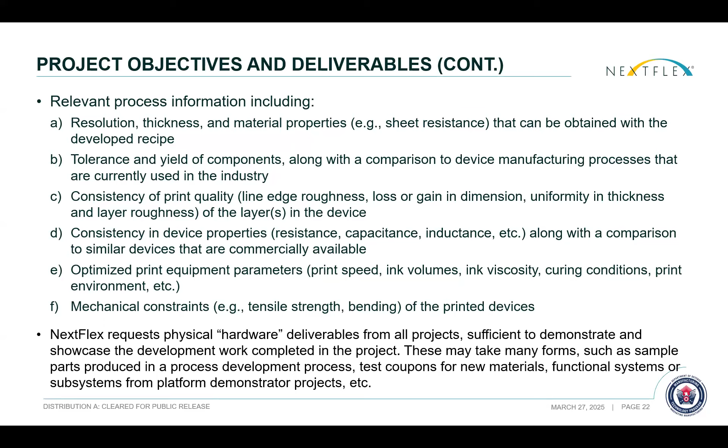We bring that up now because if we don't, it gets pushed out to the contracting stage or the pre-submission consultation. But if it still survives as an outstanding question for you, we'll end up negotiating that as part of the statement of work, and that just slows things down.

Finally, a note on platform demonstrator deliverables. The platform demonstrator topics really are seeking to demonstrate product-like capabilities. We're not funding product development. So let's talk about the difference between a platform demonstrator and a product. A product is a competitive offering you're going to put on the market that needs to address every need in a way that competes against every other product serving the same needs.

A platform demonstrator doesn't have to have all of those things that make your product competitive relative to other products, but it should still demonstrate the product-like functionality addressing the important characteristics of the system, including things like the packaging, the software and firmware support that make it look, at least at some level, like a functional end-use device.

Initially, a very simple concept: oppositely charged black and white particles, bistable—so you take the battery out and 10 years later you still have the same image. And if you want color, you could put a color filter array on top. But what if you wanted a whole wall or big areas to get color? You'd have to have large transistor arrays, which is not practical.

So you see here what's been developed in the meantime. We have full color—this whole room could be changing colors, full color, only using particles: reflective white and yellow, magenta, cyan, etc. But other aspects that can be relevant to a lot of the proposals: it is Lambertian, viewable from broad angles. I said it was bistable, directly viewable without power in full sunlight. Simple segmented printed backplanes, printed by many different methods.

Flexible, absolutely flexible, both the TFTs as well. You could cut them out to any shape, doesn't have to be rectangular.

There's near IR reflectivity. So if you had night vision goggles on in the black and white, you're in a dark room, you could read a Kindle just like it was daylight.

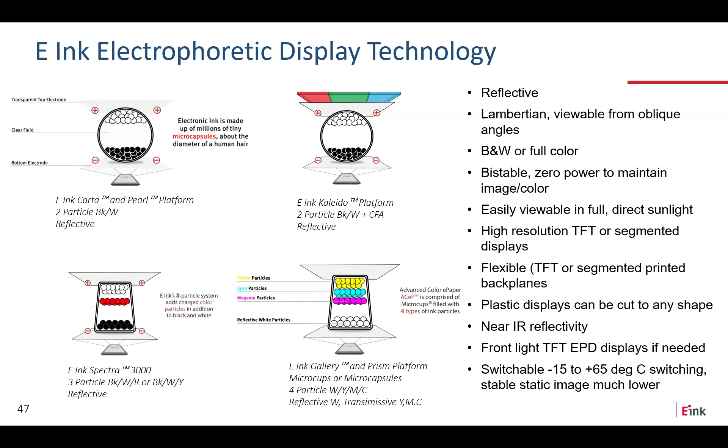And switchable, minus 15 to plus 65. But you could throw these in dry ice and you couldn't switch them, but when you warm them up, you'd still have the image throughout that temperature cycle.

So they're in lots of different products. I won't go through all these, but license plates - you pay your money and change your license plate. California, Arizona, a number of other states.

Manufacturing, Kanban, smart logistics, being able to track information on the line. You could imagine sensors, all kinds of sensors. Vision is our most powerful sense. We're talking about moving everything into a cell phone or whatever for information, but you could have things that turn colors or do things integrated with your flexible electronics as part of those proposals.

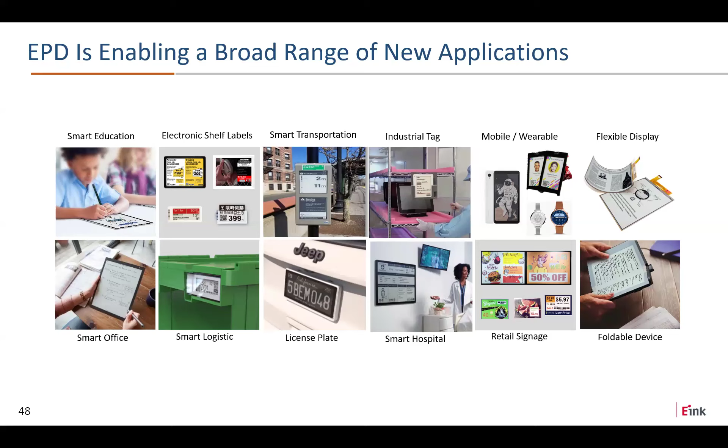These were some demonstrators over the last 15 years, all of which use discrete components, but the world has changed with FHE.

This one has no battery at all. It's a thumb drive. The power of a computer changes the display and you know how much memory you've used.

This was an early one, made in the millions. This is an early Motofone and a PC board, but the back plane was printed onto the PC board. And so the display just involved laminating electrophoretic display material onto the PC board, and you end up with this nice candy bar phone.

Well, we've moved on to smartphones, but you think about FHE and integrating a backplane with all the other printed electronics, and voila, you've got either color or black and white readout.

Beautiful watch, these were a couple thousand dollar titanium watches. Again, you can think of jewelry or other beautiful things where you have a visual effect resulting from your FHE. And this just shows some of the flexible components that went into that.

These two are interesting. This I showed in the NASA kickoff. It's all discrete components, but the power requirements are so low that there's an antenna, a printed antenna in here for data from your phone, but also power. So there's enough power given off by a smartphone to power the display as well. There's no battery or anything on there.

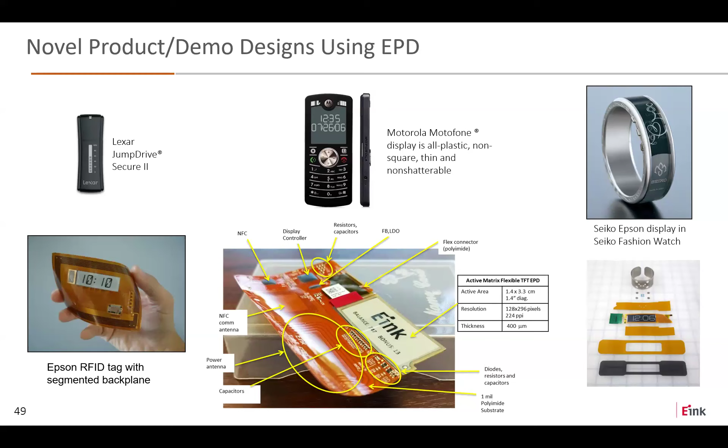So this flexible part is fine, but the rest of it is not. So you could imagine a sticker that's completely flexible because the rest of this now has moved on and it's printed in hybrid electronics now.

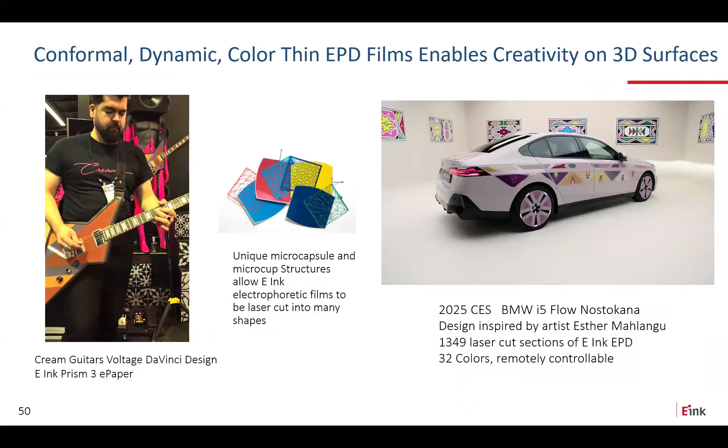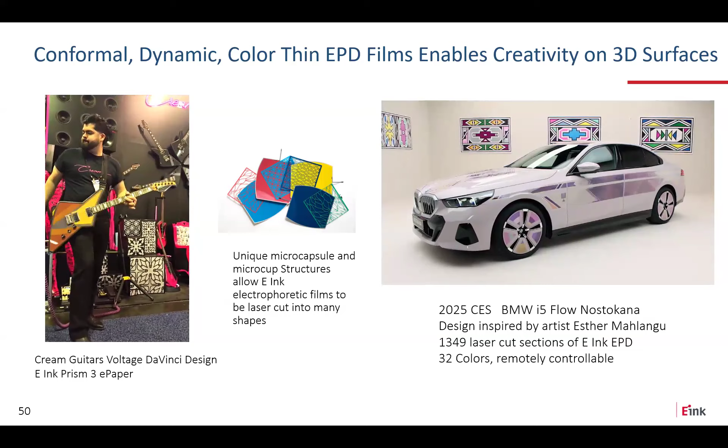Here's some more recent things. This was announced several months ago. This is a cream guitar, color changing car - so any object can be color changing, like guitars. This is work that we've been doing with BMW. It has over 1,000 laser cut electrophoretic modules that are put on there, but this is all the conductors were ribbon cables and everything. There's no reason why it doesn't have to be a car, any object. There's no reason why you couldn't print all the electrodes, all the conductive electrodes onto what you're doing.

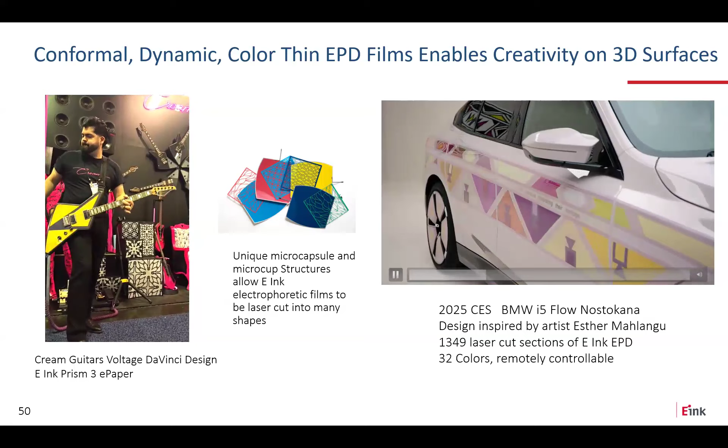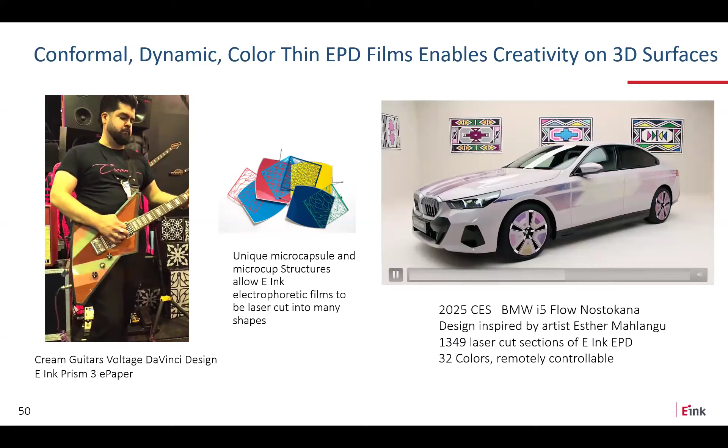And in the lab, we can spray coat. For now, we'd laminate it and then spray coat your conductor on top. So any three-dimensional object with printed electronics now could be color changing.

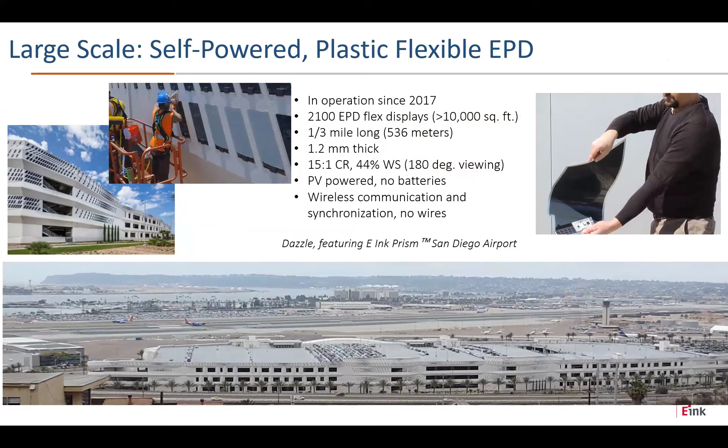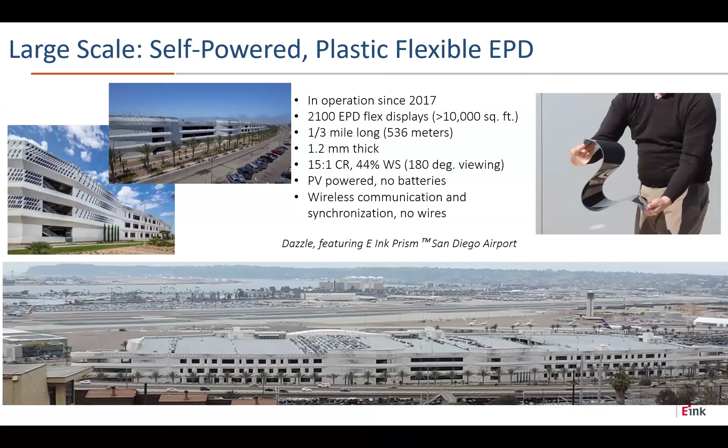This is for those of you familiar with San Diego, driving down Route 5 - this is the San Diego parking garage, and there's over 2,000 modules that you see here that are completely flexible photovoltaic cells that power this. There's no batteries, there's a super cap to store energy, completely solar powered. This has been in operation since 2017. So you drive by, you can still look at it.

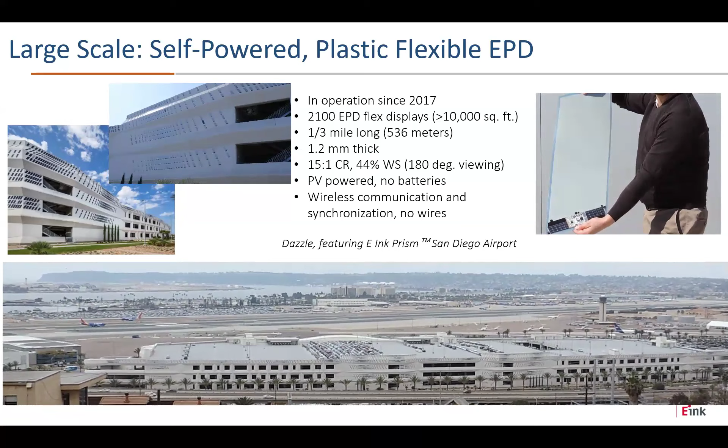Again, the interesting thing is if you look at the electronics, this is all discrete components. So everything is flexible on this except for the electronics. So you could bend it one way, more or less, but you couldn't wrap it the other way. So if the electronics were printed, it would be 100% flexible.

And again, it could be pasted up anywhere without having to wire it.

So in summary, we would love to support other companies. If you have ideas for things that you would wear, or monitors or stress sensors or whatever, why not have something that changes colors or gives you information that's integrated into your electronics? And we would love to work with any of you to help enable that. So more than my 2 minutes, but thank you.

All right, thank you, Mike. Let's see who's next. Nick, did you want to give that ahead to the... Oh yeah, so John, do you mind going? Because there's some people of interest in the audience that need to leave, I was informed. If it's all right with you. Sorry, I didn't mean to be the one that kicks people out.

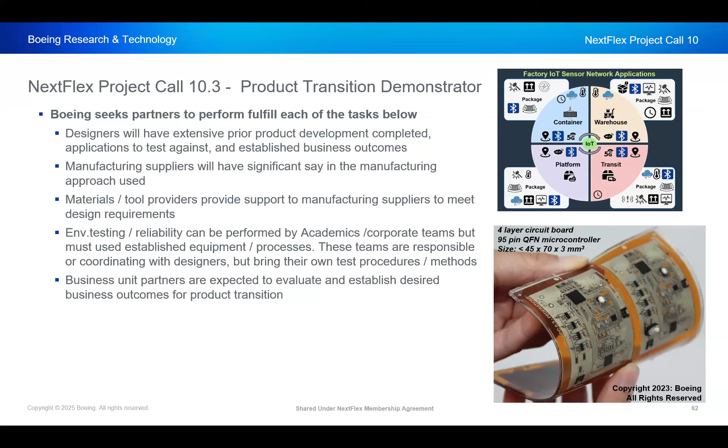If others want to join a pre-competitive solution, they can at the design phase. You're trying to go from like 6 to 8. I'm going 6 to 7. And if we get through or close to out of 7, that's great. We'll be at 7, and that's the goal: provide this transition capability for the US government. Can we go to the next slide?

We'll do printed embedded passives, perhaps. That 2-layer print should be bulleted out - either inkjet or screen print and laser trim, or if you've got a full aerosol jet. I'm not sure how to handle some of the things I don't know I can get out into industry yet, but I think those two can definitely handle it.

We'll go to die attach using both solder and anisotropic conductive paste or some other material. The trick to this is very simple: you cannot be pre-pilot if you don't have a dual supply chain. So we're going to have to show how to demonstrate this two ways.

So it's an attempt at moving very fast to prove that we can get products out. We will share every bit of the information that we learn, and any supplier and any designer can come in at any time. We're happy to work with you, happy to show you the entire process.

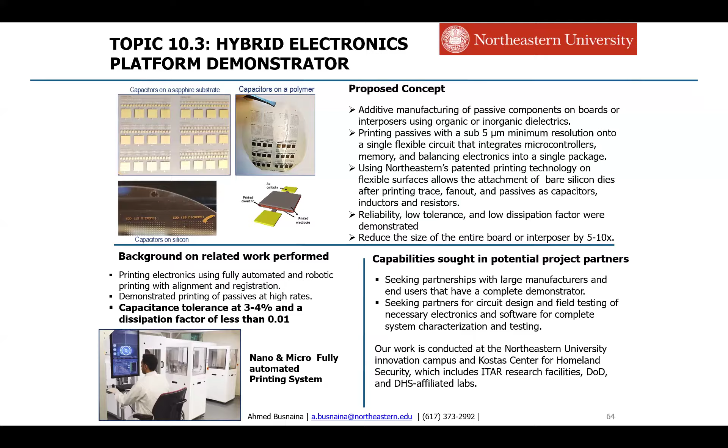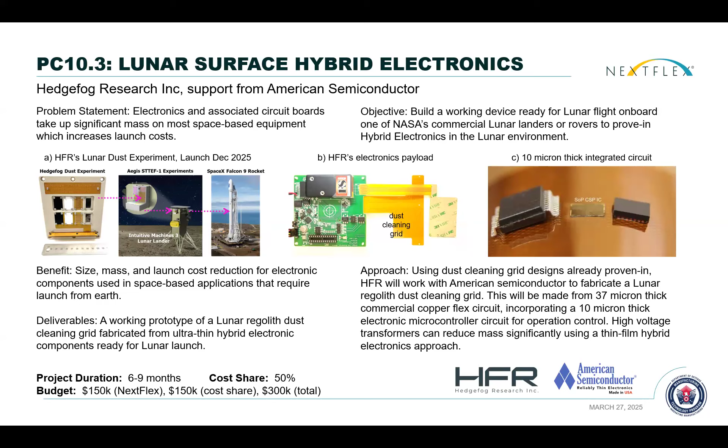All right, thank you very much. Out of this world.

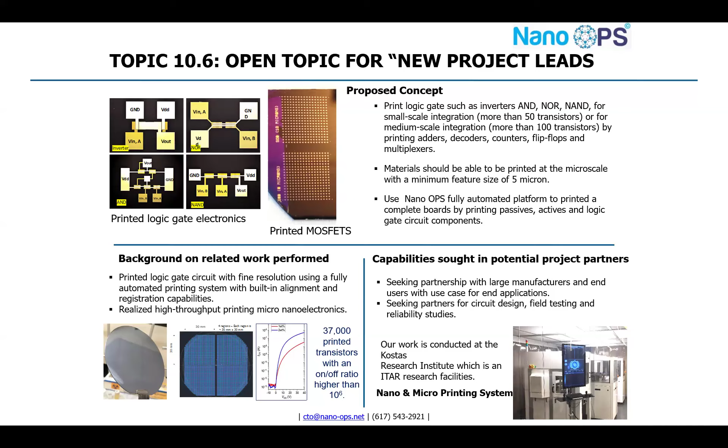Move forward. Advanced Printed Electronic Solutions. Rich, is Rich online? Yeah, hi guys. We can hear you, go ahead. Great, so the company is based in Fishkill, New York.

We pretty much focus on additive manufactured electronics, application and systems engineering, along with process development, and offer contract manufacturing services in that space, using our internal platforms as well as ones we offer as product platforms that are in development.

One of the things we've been focusing on is how do we deal with scalability and increase the throughput of these production scenarios, because all of our customers ask us one fundamental question: it's great to do printed electronics or additive based technologies, but you can't build things fast enough to make it displace other technologies. So we've been on this mission for the last year or so to develop a scalable high throughput platform we call Matrix 6D, and that's something we're going to be showing at Rapid for anyone that's going to be there, if they are around.

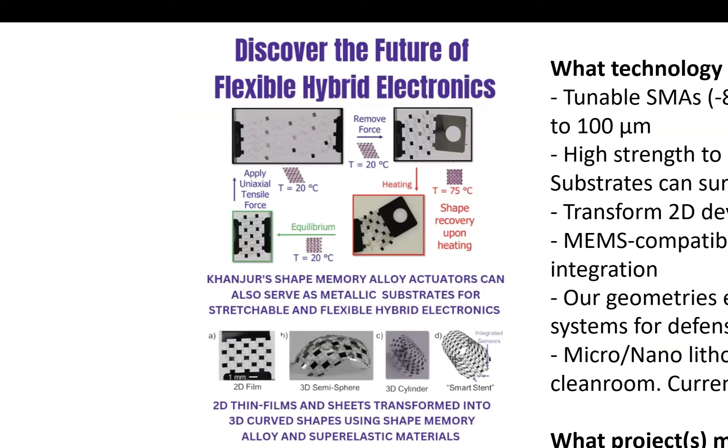So other things we can do would be, I would say, the conformal electronics. Imagine that we use our material as the next generation substrate. We want to basically fabricate it flat, put your 2D materials on top of the substrate, create all the circuits and components that you need, and then we can fabricate it after the fact to have a 3D shape that's fully conformal that we could use for wearables, use it for structural electronics.

I would say it's really great for aerospace systems because it's extremely lightweight, with one of the highest strength to weight ratios known to materials.

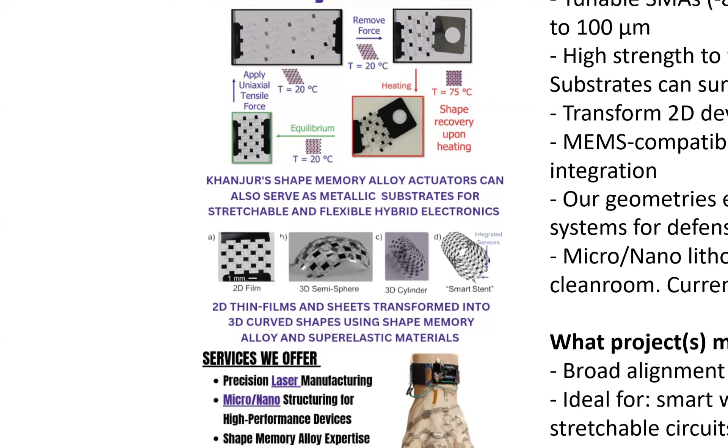So when it comes to projects, we're looking at hopefully doing an open topic for the new project leads. We would love to welcome your ideas of where the best applications for our material could be used for your projects. But in general, we would also love to be a sub on any of your projects if you think our material could help you.

So we can do this 220 nanometers all the way up to 100 microns. So if you have any questions, we'd love to talk to you. Thank you.

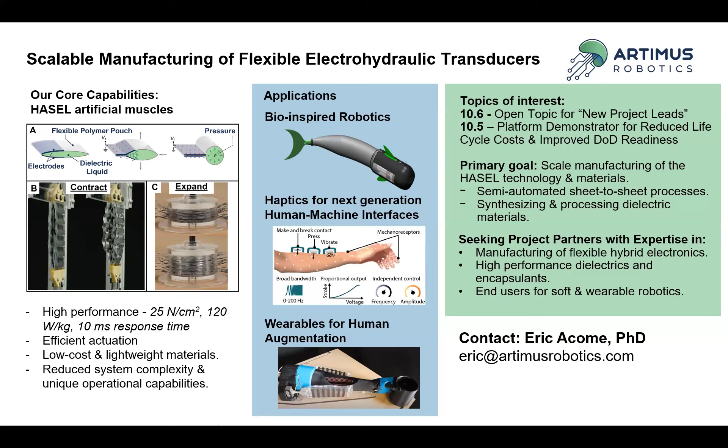All right, go ahead. Hi everyone, I'm Nick Ginga. I'm an assistant professor, mechanical engineering at the University of Alabama in Huntsville. And I'm interested in a range of topics here, but the main one here I'm proposing is the 10.6.

But my background really is in a lot of mechanical characterization and mechanical modeling, like finite element modeling, of electronic packaging and stretchable and flexible electronics. So my lab has capabilities.

We can do it in single monotonic loading and also cyclic loading. So if there's any demonstrators that need to have any type of stretch testing or reliability testing, this is something that we can definitely use for that. We have a lot of capabilities here for this bigger topic of reliability testing, whether that's more traditional flexible electronics or stretchable electronics as well.

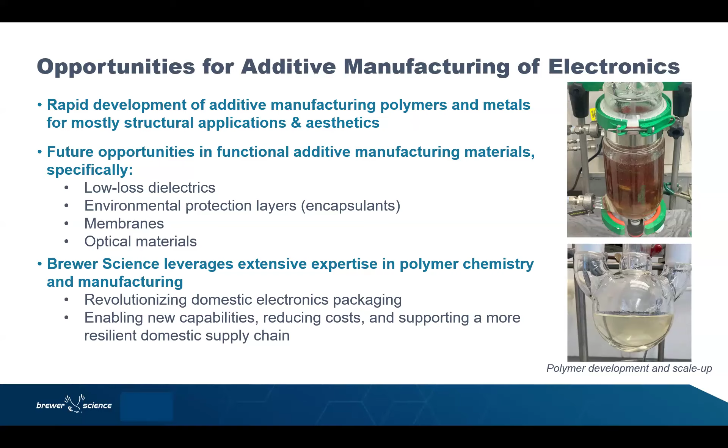I missed mentioning that I'm looking for a partner to manufacture the design and experimentally validate it, both electrically and mechanically, at the same time. I left my email address in the chat. So thank you so much.

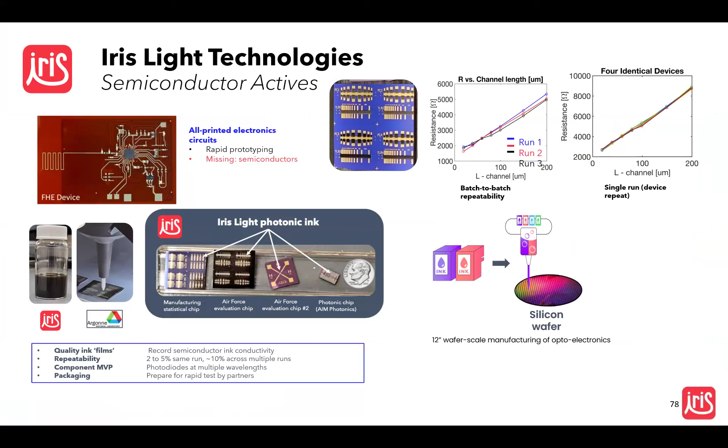Morning, everyone. I'm Harish Subramanian from Oregon State University, and with me here is Devin. We are actually representing our 10 PIs from OSU because we work on a lot of different things.

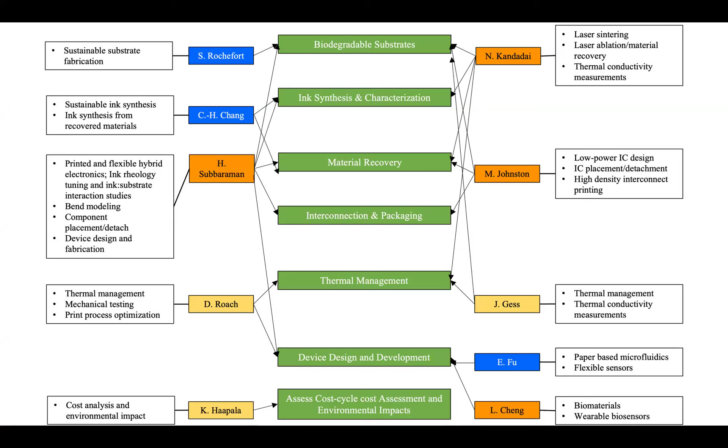All right, so this is a busy slide, so I won't go through all of it, but these are broad areas that we all work on: mainly biodegradable substrates, ink synthesis, materials recovery, interconnection and packaging, thermal management on flex substrates, device design development, and assessing life cycle costs and environmental impacts.

We have access to a wide range of print modalities, right from inkjet to dual head aerosol jet, plasma jet, and micro dispense. And here are all the people who work on different aspects of things.

Johnston is a low power electronics designer and works on stretchable electronics. Larry works on a lot of nanoparticle synthesis. Nirmala works on laser sintering and thermal conductivity measurements. Chi Hang works on ink synthesis. Joshua Gess is a thermals guy. Elaine is a bio person. Devin here works on process optimization as well as polymers. Tom Miller works on antennas. Carl does cost cycle analysis, and I work on a lot of different aspects of printed electronics.

Here's a quick snapshot of the things we work on. This is an example of using plasma jet printing to print pretty small features - we can print two metals at the same time. This is a 500 nanometer feature that was printed through a photoresist onto a substrate. So in a single step, we're now able to directly print two different materials or even fill vias and use these as alignment marks for other subsequent processing.

This is Devin, who works on novel polymer chemistry and developing polymer substrates as well as machine learning. Using laser sintering, Nirmala has demonstrated that we can get very good conductive films without melting the substrates. The same process can also be used for removing and recovering materials, and we can also print very good conductive lines on low temperature substrates.

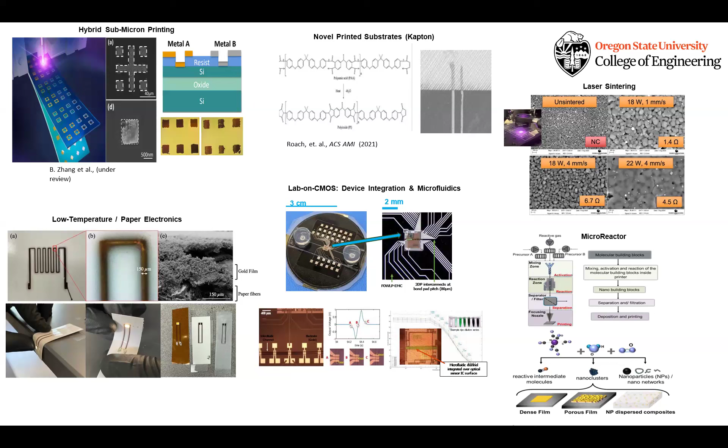Hi everyone, I'm Anthony Chico from Northrop Grumman. I work over in the space part of the company, but that doesn't mean that we don't have additive manufacturing and FHE interests in other parts of the company as well.

Let's pull up a quick slide here to show you a snapshot of what we do. We use additive manufacturing in all parts of the product life cycle, everything from prototyping to flight products to sustainment on vehicles that we support for the government. Next slide.

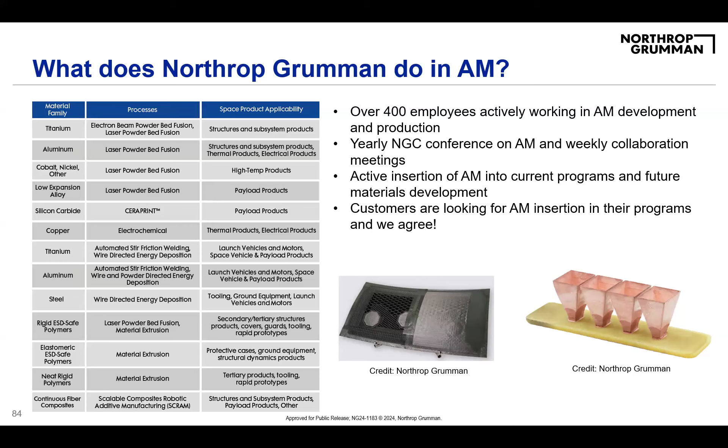So just a quick highlight of where we see FHE and printed electronics going for us in the future. One of the things we look at is spacecraft harnesses, and we think there's potential for reduction in the amount of spacecraft harnesses, the weight, and even the complexity associated with it.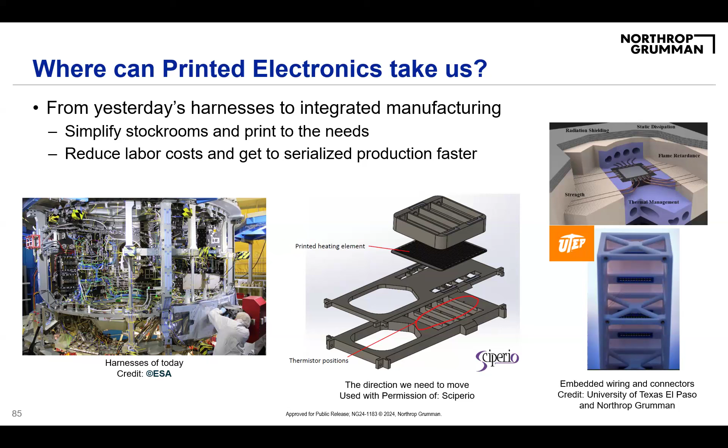But the other part is also from a packaging standpoint. If we're able to swap out components on a spacecraft, or between different serial productions of spacecraft, where we have almost a consistency in how we produce integrated layups for spacecraft, that's also of high interest to us.

A little further out, one of the things I don't list on this slide, but where we see the biggest part of this, is really just the responsiveness that additive processes can have when it comes to producing spacecraft.

One of the things we look at is whether we'll be able to produce things on the ground, but also produce things in space, and have a responsive type of space architecture. For example, if you had a fire occurring in California—which we obviously had a very bad fire season this year—could we print satellites in space and send them out so we could get information down to first responders as soon as possible, instead of what can often be a 24-hour delay in getting data on where the fire has been and where it's going.

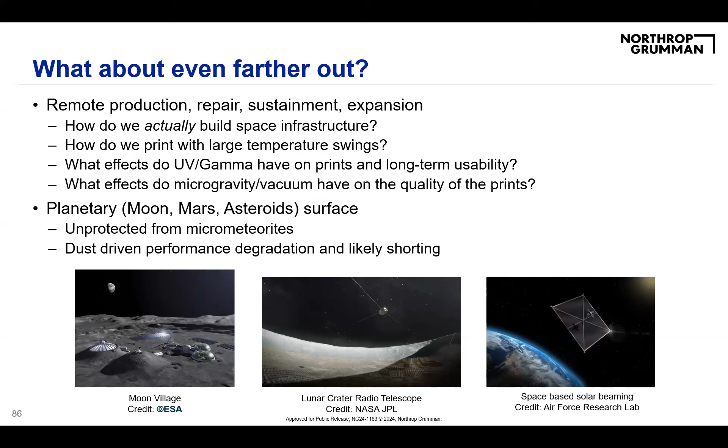So what do we see? There are a lot of outstanding issues when it comes to printed electronics and being able to use them for spacecraft. But I think a lot of these things are being worked on.

Right now we're interested in all the project areas. I'd like to thank NextFlex for sponsoring this in association with the conference right before this—it helped us put together one of our teams for one of the project areas. But we still have interest in all of these. We're particularly interested in acting as the transition partner in any of those topic areas, and especially working with universities and finding university partners that want to enter this type of field.

But then also other fields that Northrop Grumman works on, whether it be munitions, aerospace systems, or ground control and ground systems that we support for our troops. So, I'll just provide my information right here. Thank you very much.

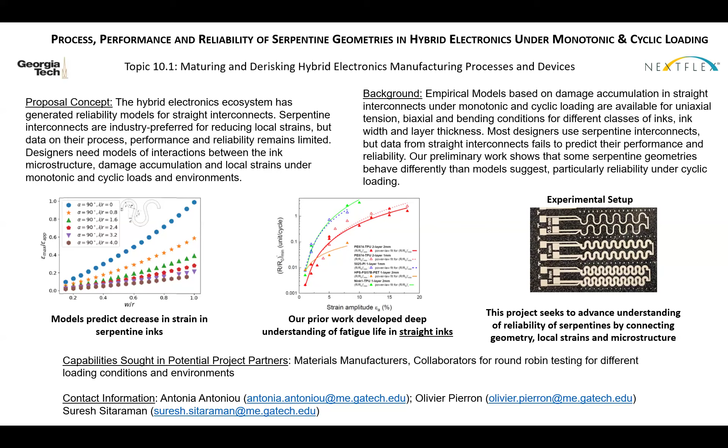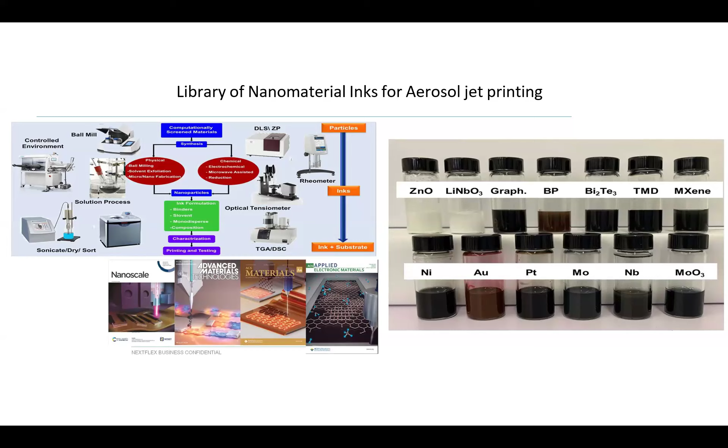Hi everyone, my name is Tony Varghese. I'm from Boise State University. What we offer is a library of nanomaterial inks and an extensive characterization of these nanomaterial inks that can be suited for multiple printer modalities, including aerosol jet, inkjet, plasma jet, and extrusion-based printing capabilities. We have the capabilities to make nanomaterials and particle-free reactive inks also suitable for certain materials.

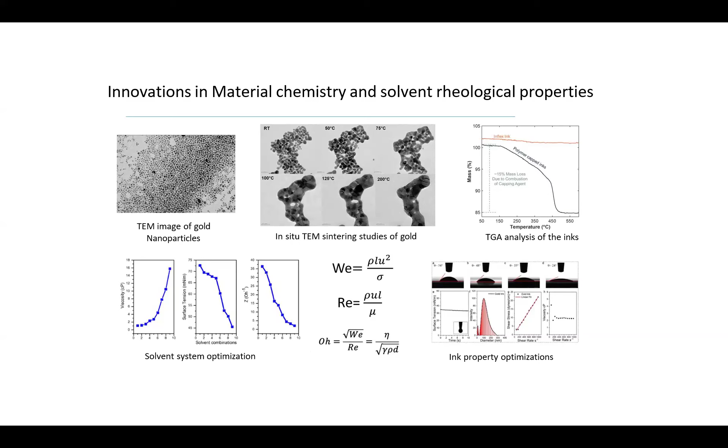We primarily work on developing these low temperature, low additive inks that can be stable and also reduce degassing when you go to higher temperature and maintain good electrical performance. We also extensively study the solvent and ink properties to understand and develop reliable inks that can be finely tuned for different modalities.

We have demonstrated using both aerosol jet and inkjet printers for multiple inks. We can print consistently close to 50 micrometer resolution using an aerosol jet printer. We can use them for wafer scale printing and also achieve conductivity very close to bulk-like. For example, a gold nanoparticle ink we developed in-house, and we can show that for other materials too. So we are here to collaborate, and if you're interested, we're happy to work with you on ink standardization or reliability testing, everything related to that. Thank you.

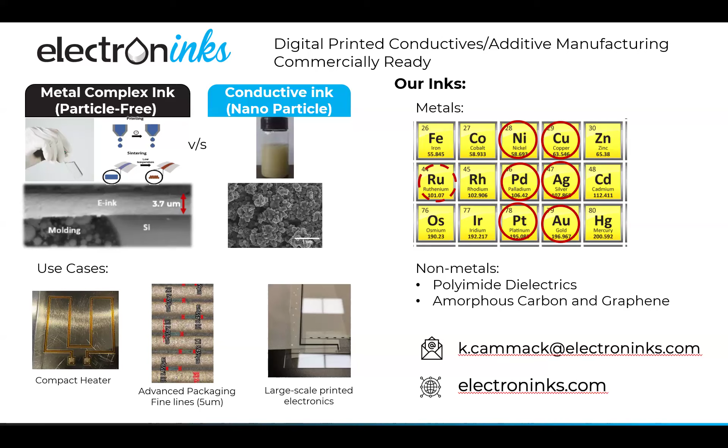Although I guess I will ask if there's anybody else in the room, because I've been very impressed and kind of inspired by the number of folks who have come forward during the session today with additional information that they perhaps saw something in another presentation and that motivated them to share.